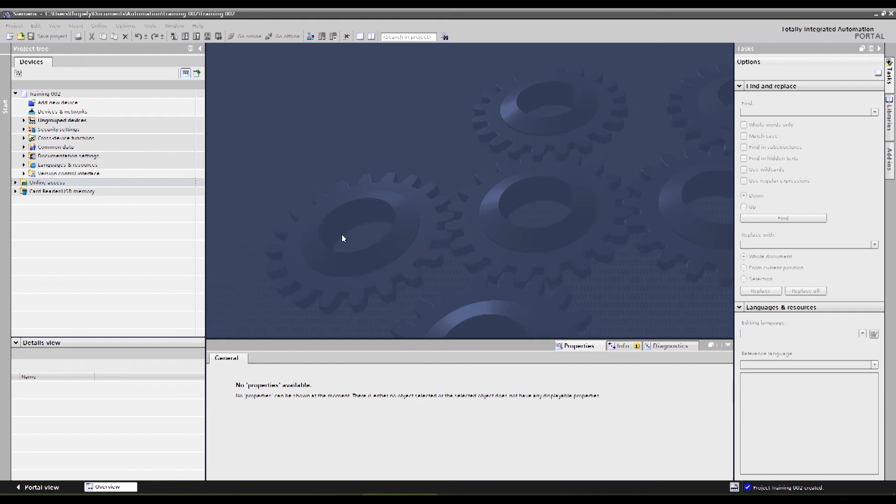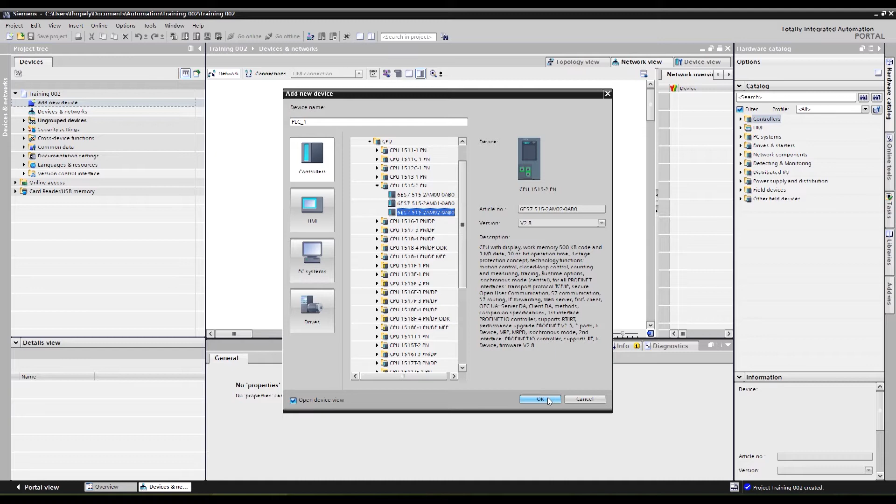Today we're going to do something special. We are going to go through common pitfalls when setting up a Siemens S120 drive. So the first thing we're going to do is pick a PLC. And in this case, I'm going to pick a 1515. The reason for this is it has two Ethernet interfaces, and we'll go into why that's important in a moment.

Okay, we can pretty much ignore all the device configuration because I don't care. Now we're going to add an S120 into our project. Here's our CU320-2PN.

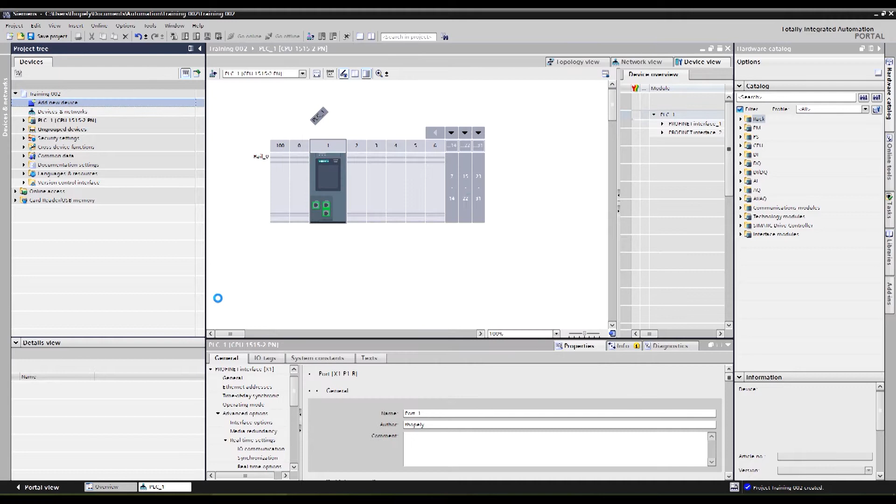Okay, so what's our first common pitfall? Well, it's the line module. Let's go take my smart line module. I think that's, for me, the most common, but there's plenty of active line modules as well. Okay, populate that into our project.

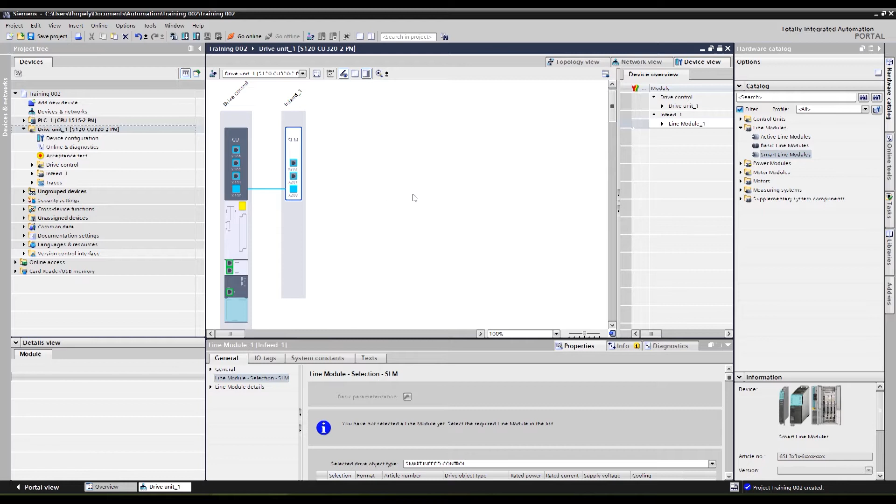And the first thing I'm going to do is define what version it is. And oh, look, I bought the 5 kilowatt smart line module. Why isn't it in this list? Well, it's not in this list because the 5 kilowatt one doesn't have a DRIVE-CLiQ interface. If you have a 5 kilowatt smart line module, well then, you can just go ahead and delete it. We don't really care.

You are going to do some defining of the interconnections of when the smart line module is ready by way of just blindly assuming that it is ready, which is a bad idea because if you enable the motor modules before the smart line module, or any of the line modules, has had a chance to fully come up to DC power, you could blow the pre-charge circuit or other bad stuff. Don't do it if you have a real machine.

I use that scenario on my demo unit all the time because I'm kind of controlling what I'm doing pretty strictly. However, in a real machine, you don't want to take that chance and blow something up, right? So always use the interconnection and define it properly. If you look in either the hardware installation manual or the commissioning manual, it kind of walks you through some of that. We'll talk about manuals in a different video, but there's pitfall number 1.

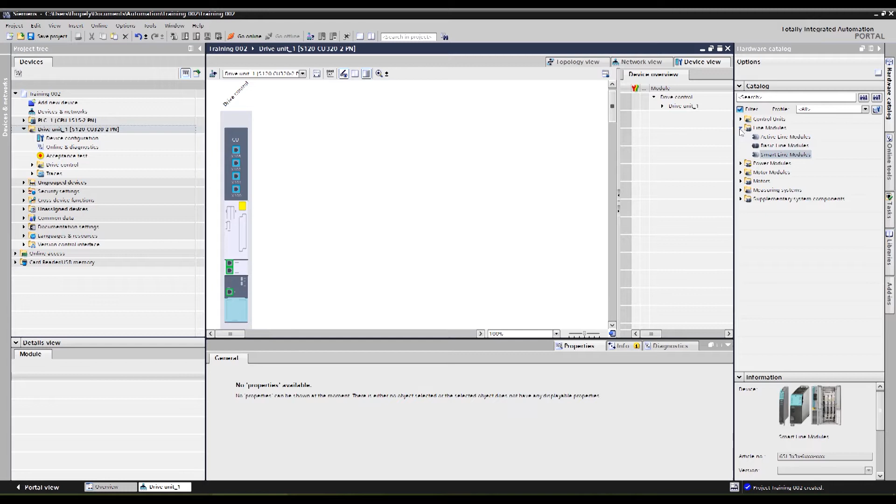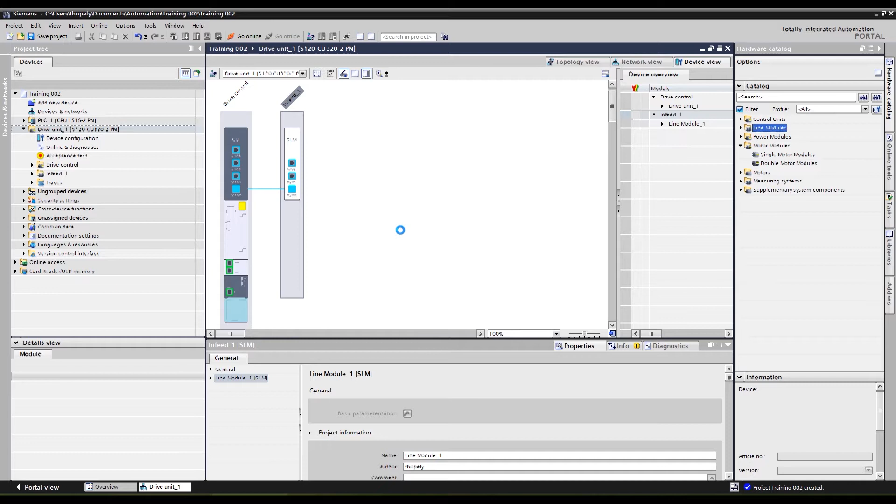Okay. Next, I'm going to add in, you know what? Here's what we'll do. We'll add in that smart line module still. Put in a double motor module, and we'll see what happens. Okay, you'll notice that the control unit topology went straight from CU to smart line module to dual motor module. Okay.

If I later define this as a vector, this is not an ideal topology for that. When you're using vector drives in vector algorithm, right? And keep in mind, you can use the vector algorithm on both a servo motor or an induction motor. It's just the algorithm that it utilizes.

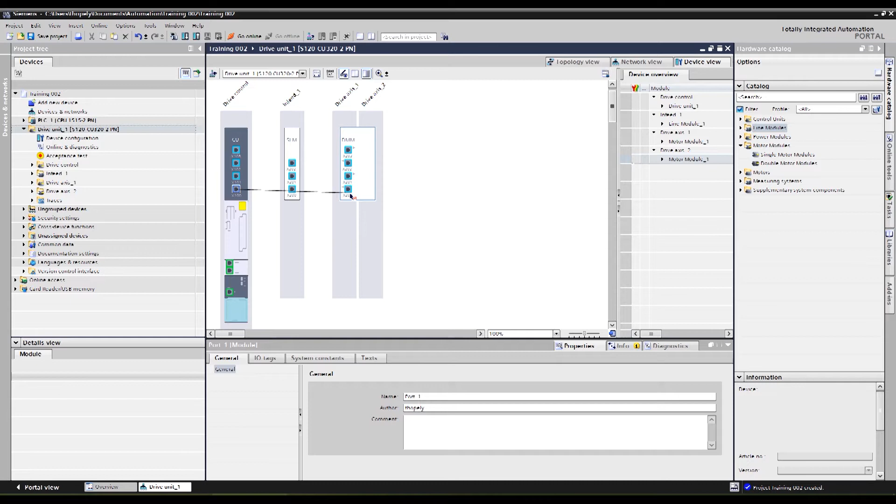The correct way to do this would be to delete these, drag, drop like this, drag and drop like that. Okay. The reason being that the smart line module doesn't quite support the bandwidth required in the DRIVE-CLiQ chain in order to accommodate the higher bandwidth that vector algorithm uses.

So, and again, it's either in the hardware installation manual or the commissioning manual or what have you. Sorry, there are so many manuals with Siemens. The plus side is the information is always there. You could just spend a couple days looking for it.

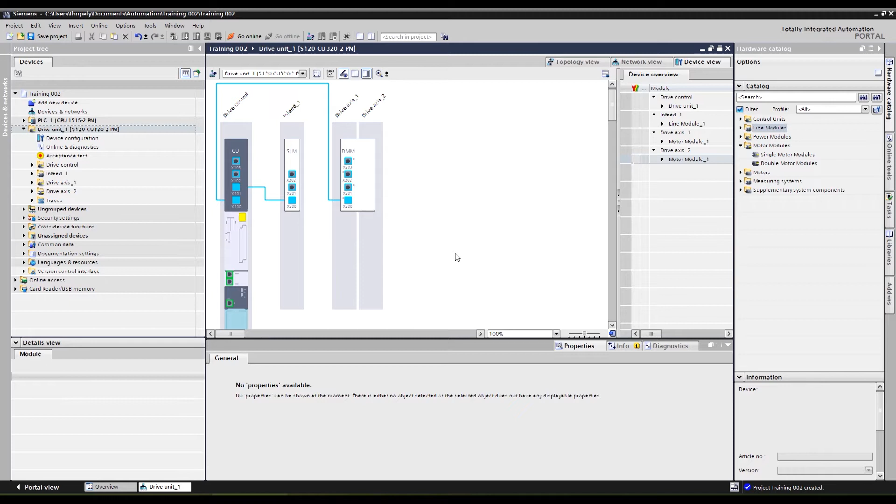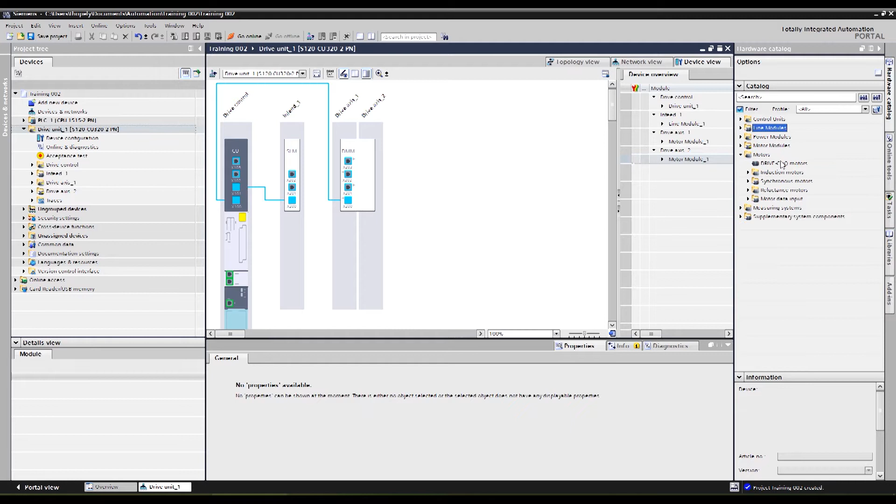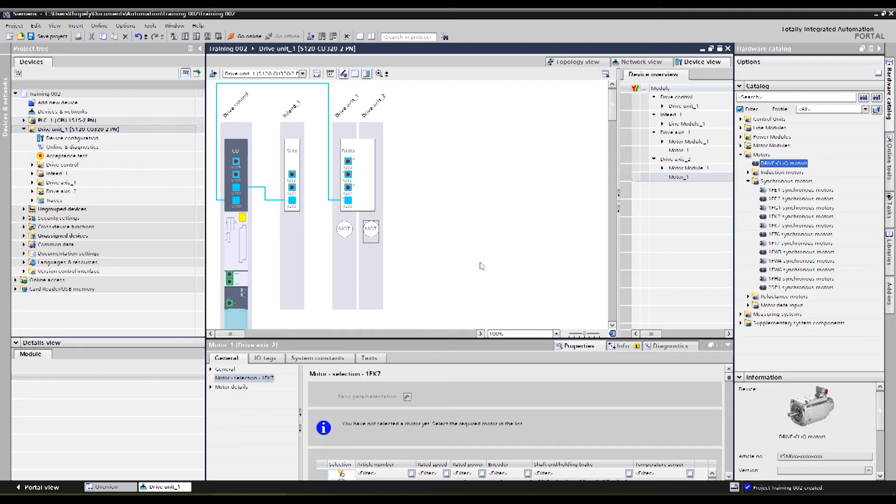All right, but moving on. The next common pitfall is quite a bit later. I'm going to do like I have in a couple previous videos. I'm going to spell out exactly which DRIVE-CLiQ motor I'm using, even though again I could use this DRIVE-CLiQ motor option up here. Okay, so let's go define all our hardware.

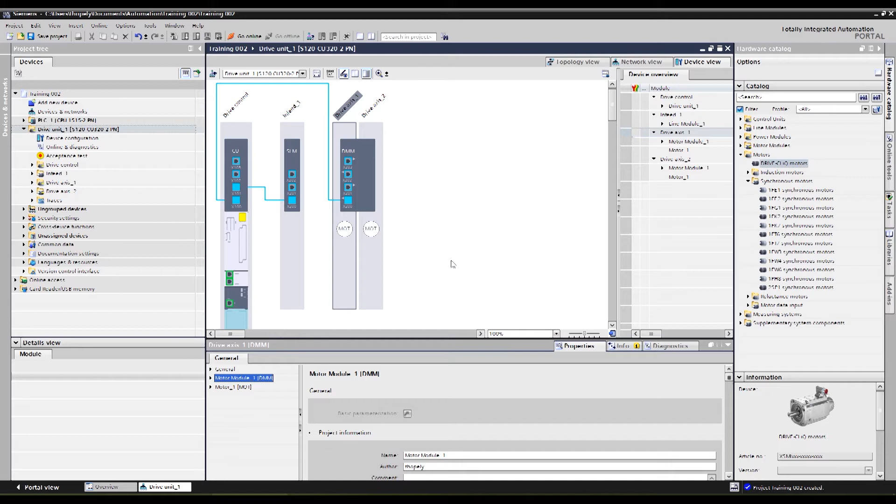Use this 16 kilowatt because that's the smallest one I can. In the motor module, I'm going to go pick the 3 amp. Motor details. You can see I tend to start with the 1FK7, right? We do have smaller 1FK7 motors, the 022 and the 011 or 015 as well.

But due to some size restrictions, the 1FK7 011 and 022 never got updated to the second generation of motors. Now, they're still available, those 1FK7 022s, as the first generation, but there's a handful of features missing from that. So I usually default to the 032. Obviously, it's quite a bit bigger, but due to some of the manufacturing changes they've made for the second gen 1FK7 motors, it's a superior product, and it usually costs less, even though you've got a much larger motor.

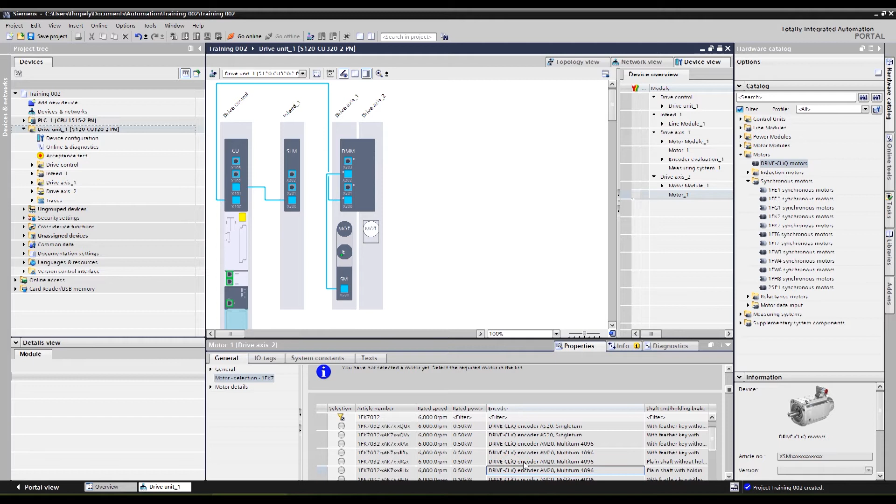Obviously, you can't always put a 1FK7 032 into the spot of an 022 design-wise, but I always try to start with that. No, not that one. And if that ends up being too big for my design, then go down to one of the smaller ones. We, of course, do have the S210s with their 1FK2 motors. And I started off quite a bit before those were available. So I just have this sort of muscle memory of the 1FK7 motors, as it were.

They're my go-to. But the 1FK2 motors are fantastic motors, and they have pretty much all the features that you need from typical servo motor applications. The 1FK7s are a little more capable, slightly higher power densities, higher resolutions, those sort of things. And obviously, the S210 servo drives are what they are. You can get a lot more functionality out of the S120 drive, but you don't always need that. Okay, so we've got everything defined. Great.

Let's go and define our... what am I doing? Device configuration. We're going to define our telegram of our drives. Okay, so let's say I'm going to use technology objects. I go to Telegram 105 for a technology object. Oh, actually, this is another pitfall. If I'm not using technology objects, let's say I want to use position control completely in the drive and use something like SINA_POS or the basic positioner technology object to control this drive. Well, that would mean I use Telegram 111. You can see it's not in this list.

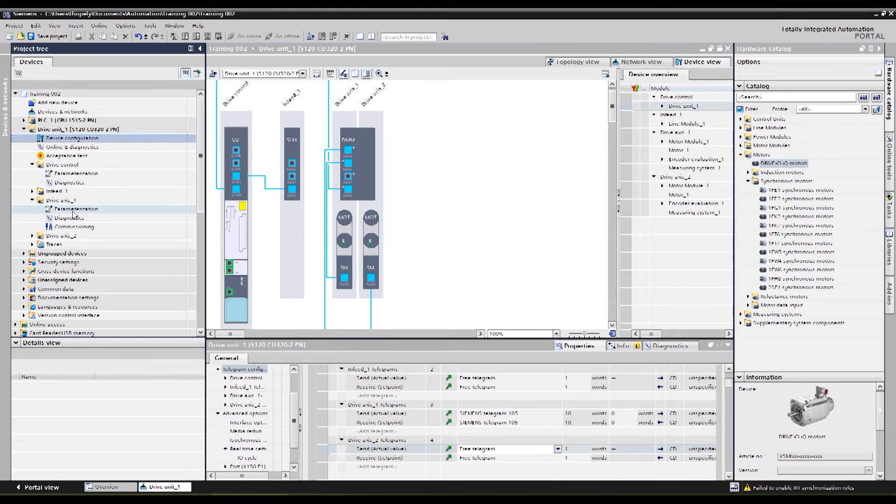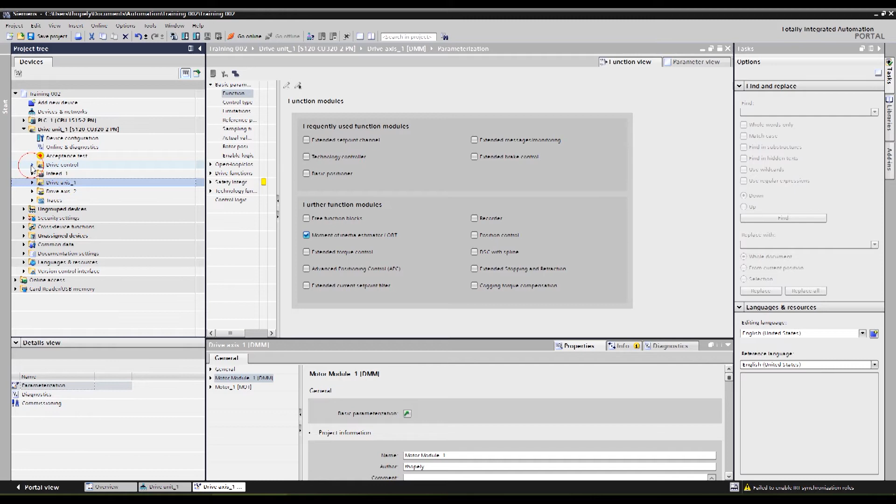What I have to do first is go into the parameterization of the drive and enable the basic positioner function module before Telegram 111 will be accessible. Okay. But in our case, I'm trying to show off something else. We've got Telegram 105 on both of these. Oh, there we go. All right. And now, I can't remember if it's because of the order I did things or not, but I did the Telegram first, right? And then I'm going to go in and define my connection to my PLC. Okay.

Right, as always, I can drag and drop. Let's see, I hover on this one. What is this? This is my Ethernet, my X127 commissioning interface, right? And the top one, hover over that, and it didn't really tell me either. Profinet interface, yeah, that's my Profinet X150; bottom one is my X127 commissioning interface. Let's see if it'll even let us drag and drop this onto the PLC. Yep, it will.

Keep in mind, if I make this connection to X127, it doesn't support IRT. I don't even think it supports most Profinet functions. It's designed for plugging your PC directly into that port, or plugging it into a switch, which then lets you program the drive without mucking up the Profinet traffic or anything like that. Right? So that's bad. We don't want to do that. Okay. One of the plus sides of this left click on that not assigned is if I do that, it automatically knows, yeah, you want to use the Profinet connection, the X150.

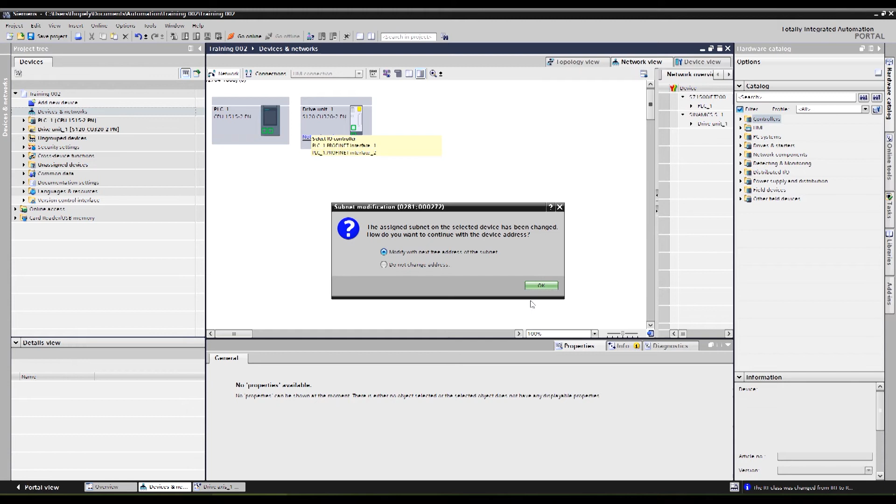But I could make the wrong connection here too by choosing, excuse me, Profinet interface 2. Yes, let's modify. What that was just automatically changing the subnet of the drive to match that of P2, or port 2 of the PLC. This port does have Profinet, however, it does not support IRT communications, which is required for Telegram 105. So that's another common pitfall. Now, this port, like I said, does support Profinet, although in a limited fashion. Typically, it will support fewer nodes than the main P1 interface.

Okay, let's go ahead and delete that connection. There we go. So we're going to choose Profinet interface 1. Yes, modify. So they're on the same subnet. Okay, great. Everything's talking. One might assume, okay, that's enough. We're talking. Let's just go ahead and compile the PLC, so everything's good and happy. Oh no, what is all this? Well, fortunately, some of these alarms are pretty good.

Isochronous mode is enabled, blah, blah, blah. Let's see, modules need to be in isochronous mode. Actually, yeah, I don't even see a message saying that the thing that is wrong that I'm thinking of.

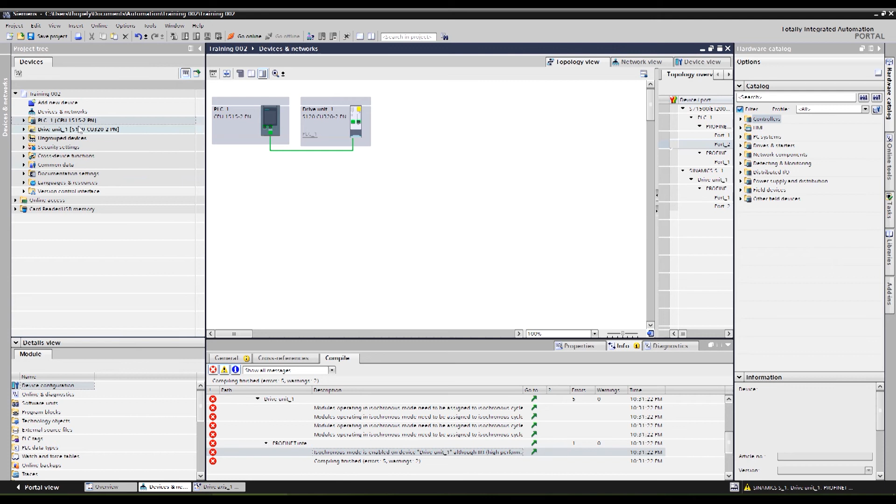Okay, that's got to be it. Everything's good now. Go ahead and compile. Oh no, everything's still screwed up. And the reason for that is, if we expand this message, it says modules operating in isochronous need to be assigned to an isochronous cycle organization block. Well, since we're planning on utilizing technology objects, it would be MC servo OB, which hasn't been defined yet because we haven't added in a technology object.

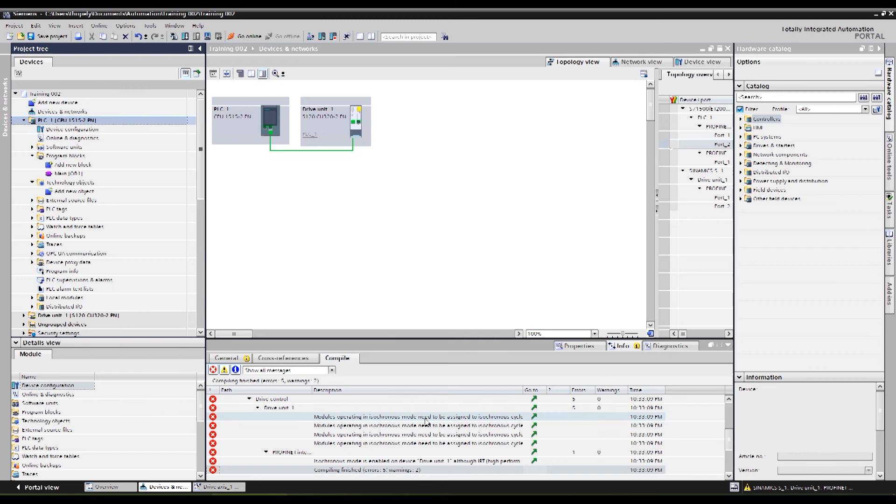So you may get stuck in this land of, oh, where's this fault? And you click on the link and there's nothing there. You could be chasing your tail for quite a while before you realize that all you need to do is keep moving forward in order to get rid of these. Right? So in this case, we'll just go add in a positioning technology object.

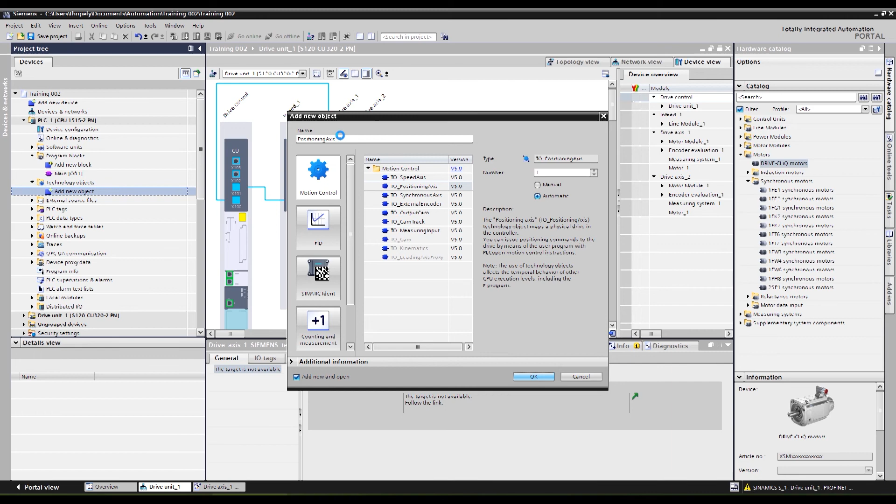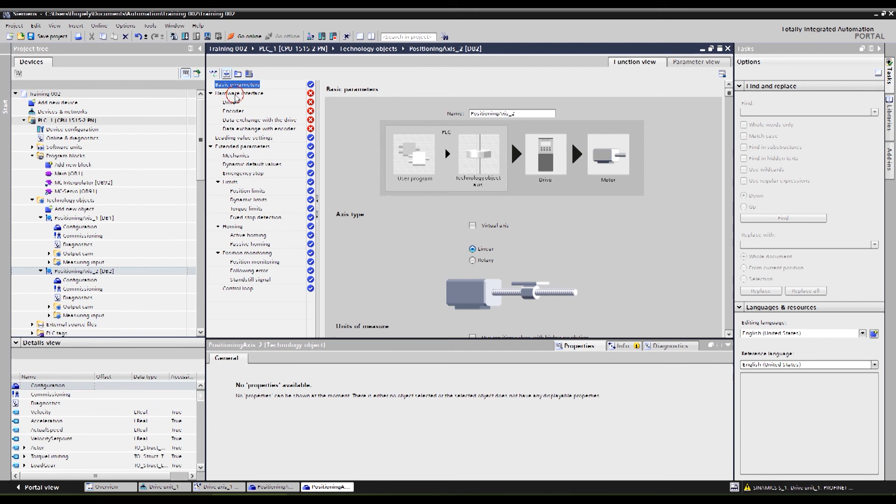And you see when we do that, that automatically adds in MC servo, and that's going to be our sync domain block. So let's make the connection here. Technology object 1 will be drive axis 1. Add in another. Define this connection to the next axis. There we go. Okay. Now, click on the PLC. Click compile.

Okay, so we still have something not happy. Let's see what this says. Let's click on that link. And because we messed around with our PLC connections so many times in our network and then added topology, yada yada, it should typically set up the sync domain for you. But if you got stuck in some of that no man's land before, this may not have happened correctly.

So now we got to go in and ensure that in the properties of our PLC, under advanced options, real-time settings, we select IRT. That sets up the PLC as the sync domain master, sets up a sync domain, yada yada. And I don't recall if there's anything else we need to do. Isochronous mode is enabled. And you can see that these two drive axes telegrams are set up for isochronous mode as well. So that might be it. Let's give it one more go.

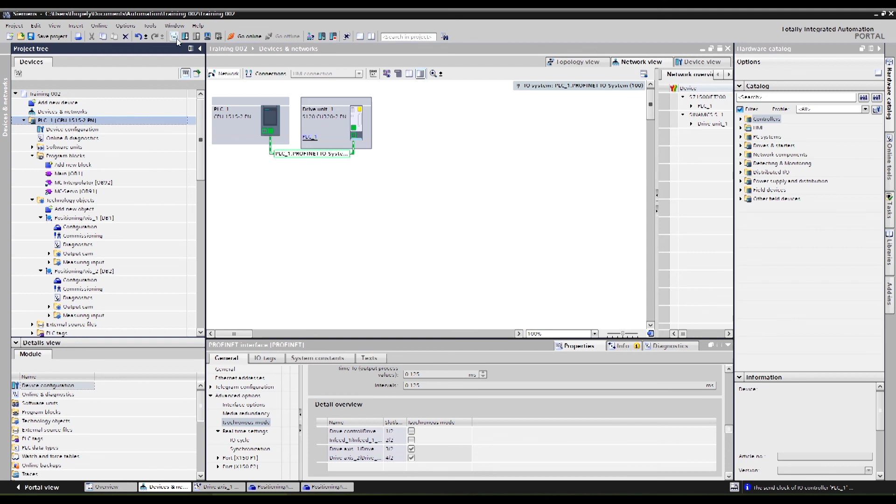Hey, there we are. Okay, so I think that's the majority of the issues that I've encountered and seen other people encounter in the past in terms of at least getting a drive set up for technology objects. There are by no means just those. But I thought a video like this would be very helpful because I find this sort of help to be pretty uncommon. So I wanted to have a handful of videos where I go through and set things up and run into those same problems that a lot of people do.

A lot of times in these videos you say, oh, you just drop this in, do things in the perfect order and everything's fine. And in the real world, right, it never happens that smoothly. So I wanted to make a video where it obviously doesn't happen smoothly and we can work through some of those issues.